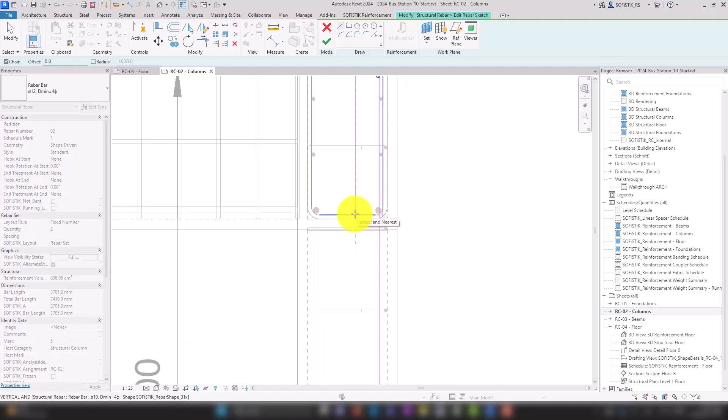The usual Revit functions are available for sketching. We intersect these two segments and we are actually already done. Of course, an experienced designer would have already used cranked rebars right from the beginning and avoided this work step. But there are often unforeseen changes.

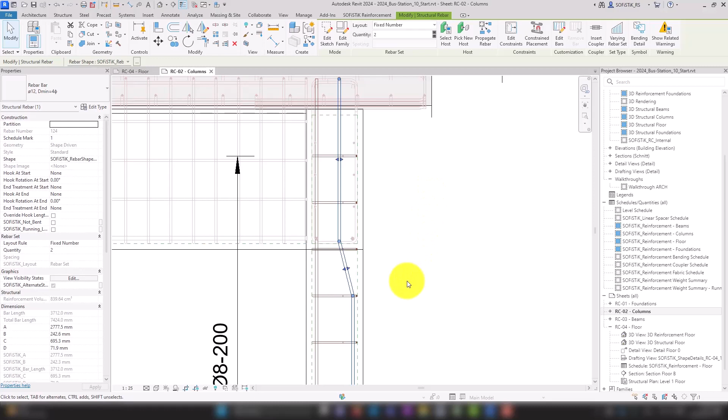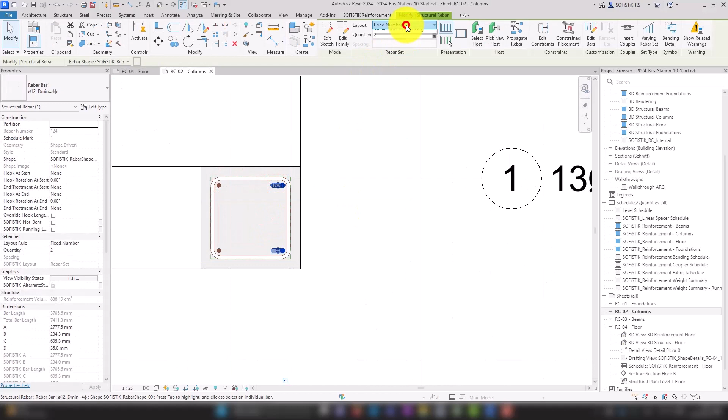We can set the desired offset here using the segment length parameter D. I will choose 35 millimeters. And let's switch to the top view to rotate our bars towards the center of the column. To do this, we change the layout rule to single and rotate the rebar around this point by 45 degrees.

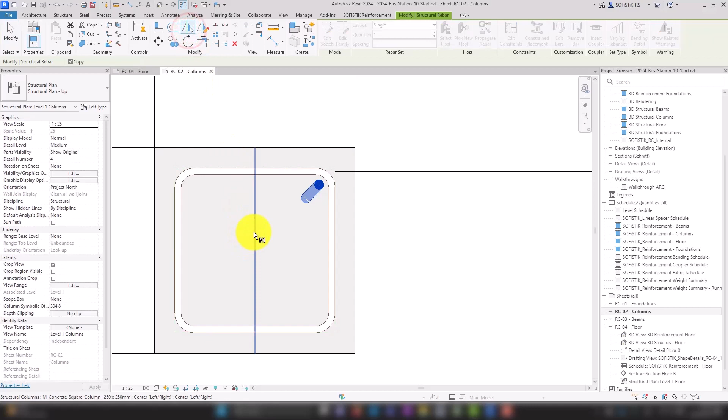We can delete the rebar set here on the left side, and I will mirror our existing rebars here horizontally and the first one, and I will mirror both together vertically.

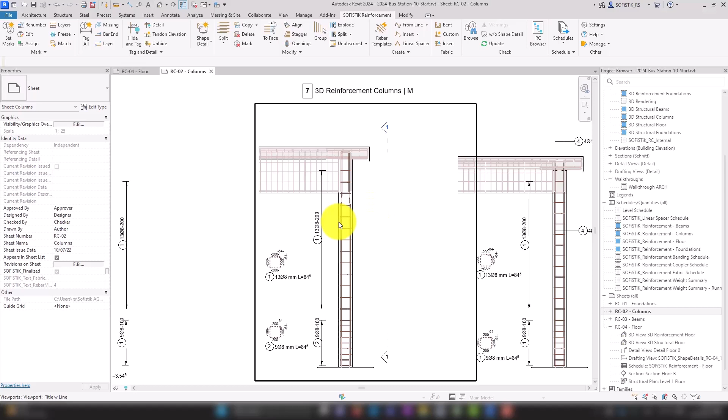Although the rebar shape updates automatically, if a rebar set is deleted or, as it happened, the bending shape is changed, the shape detail is also deleted and needs to be created again. A good moment for the Without Shape Detail tool, which hides all the rebar sets that already have a shape detail. Now we can comfortably add the two missing shape details. I would like to remind you once again to use the Shift key for orthogonal placement.

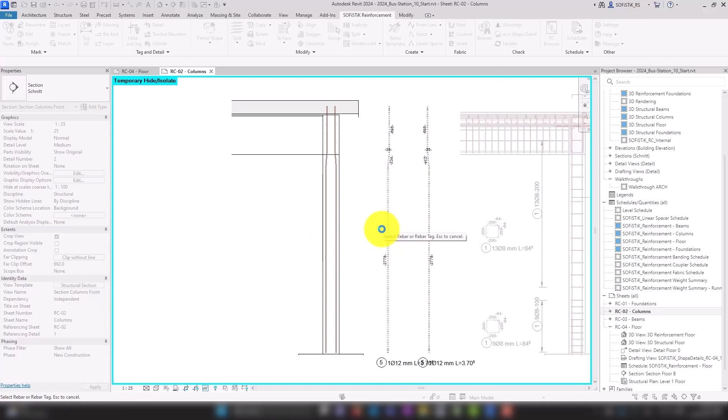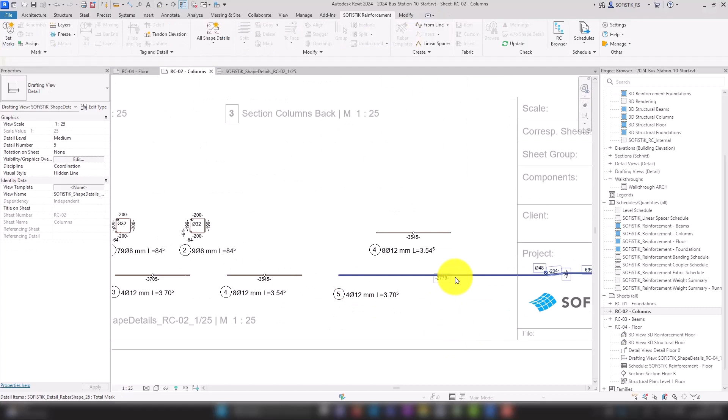Let's also update all of our shape details in the view. To do that, we click on All Shape Details. Now we either adjust our shapes here as desired, or we can also delete this drafting view in the project browser and let the program regenerate the entire arrangement. So let's delete it here. So depending on how much you have already adjusted, one or the other way may be the better one.

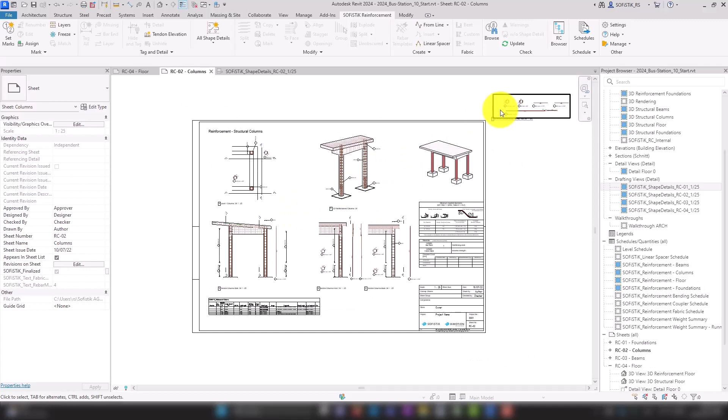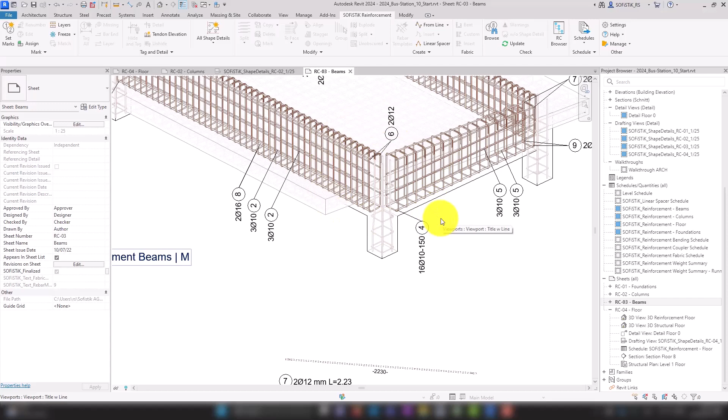Let's move on to the connection bars in the corner joints and switch to the beam sheet RC03. We have already learned all the input methods required for this joint. I will not explain in detail every click anymore, but we will go through the rough steps together once again.

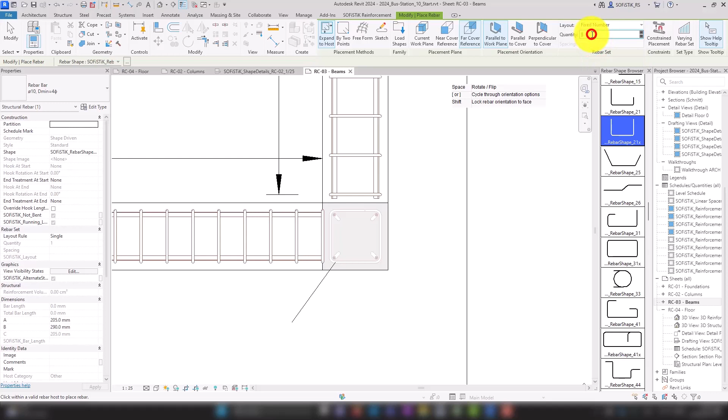We start with the horizontally crossing stirrups between our beams. I choose the beam reinforcement and the bending shape 21x, the far cover reference, layout rule fixed number with 4 bars. Now we rotate the stirrup and place it with a click. The stirrup is still too long and too wide, so we adjust the parameters A to 600 millimeters and B to 180 millimeters.

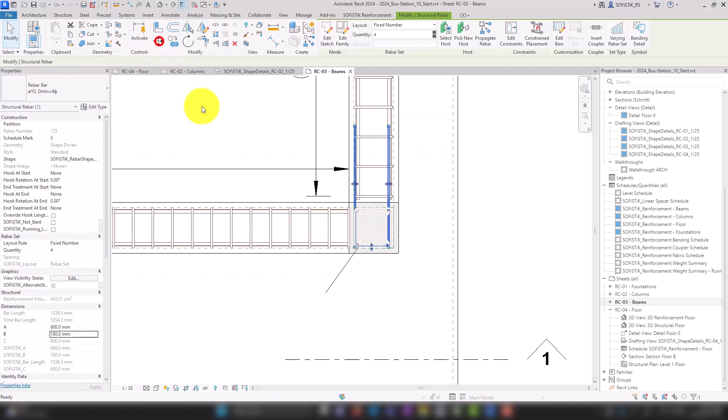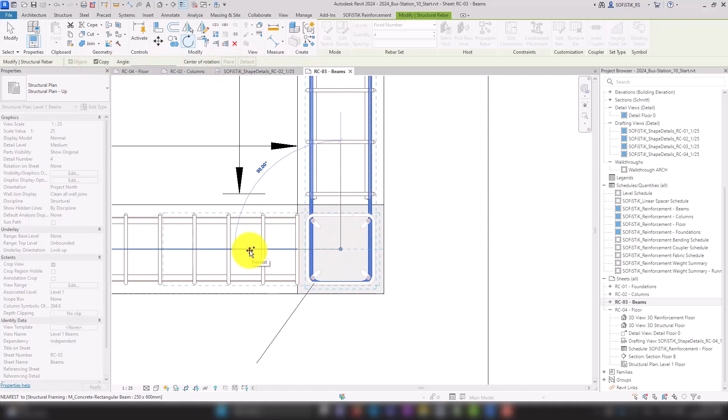And now we move our stirrup 1 centimeter to the right. For the second direction, in the other beam, we rotate the rebar set. Activate as a copy around the center of the column by 90 degrees. The next step here in the side view would be to align our stirrups vertically, either by using the shape handles or the rebar constraints.

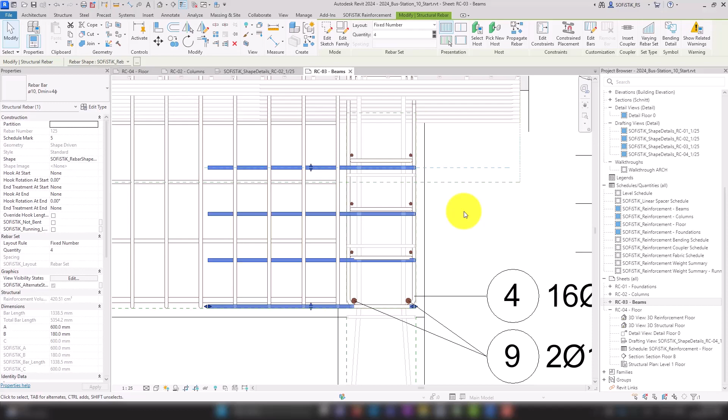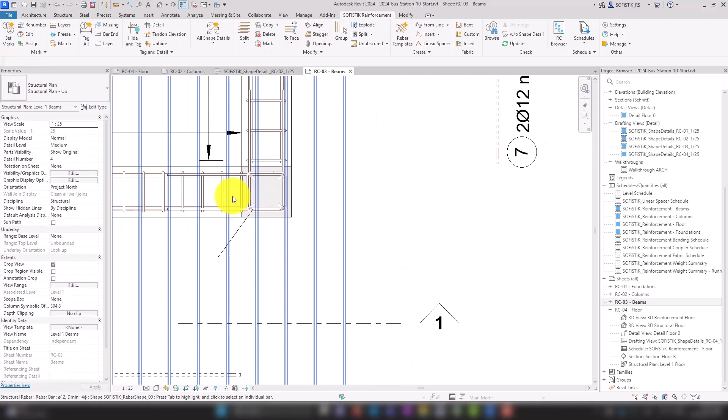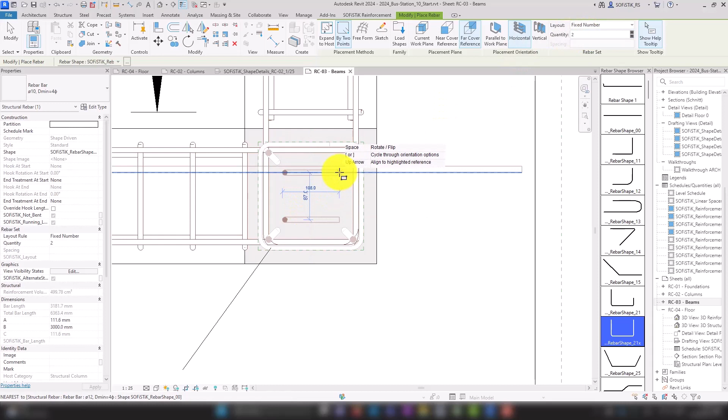Please create one stirrup at the top of the slab of the ceiling. We also need two vertical stirrups in the corners, as well as two connecting bars at our columns. We can create them here in the top view, for example, using the placement method with 2 points and a quantity of 2, and place them. And we can also rotate them as often as needed by clicking the spacebar.

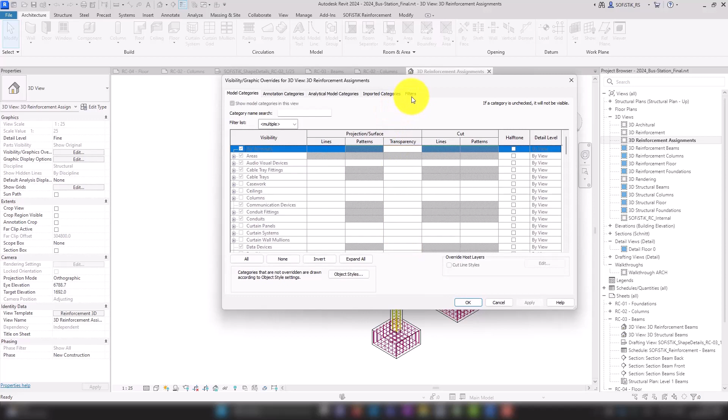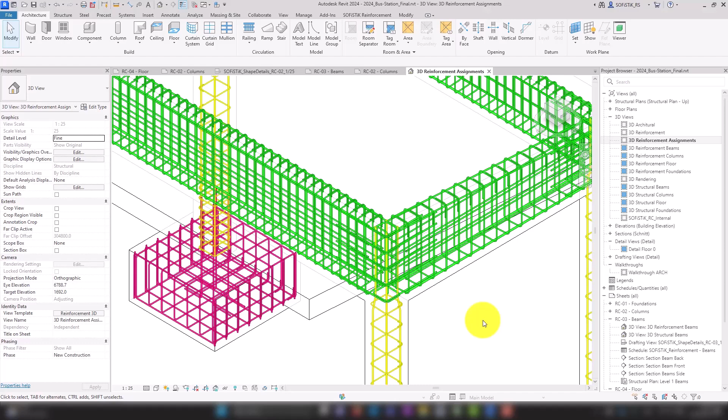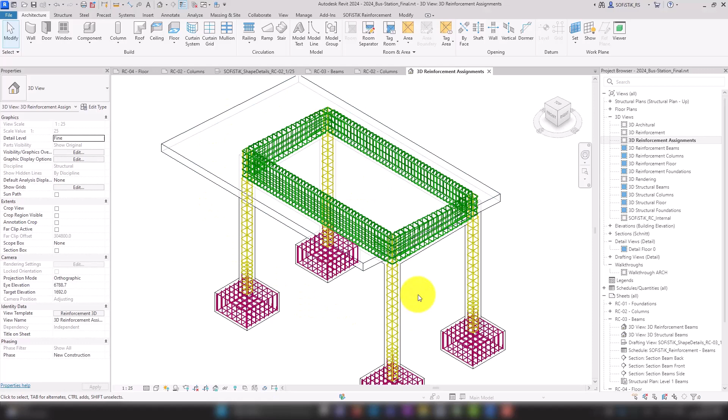I will briefly hide the slab reinforcement using our filter. And now we see our rebars again. The sloped one in the side beam, the two vertical ones, and so on. Please remember to copy or mirror the rebars to the corners to get the correct number of bars. Also, pay attention to the correct sheet assignment, which we can easily check using these color filters. A look at the detailed sheet here in the final project will surely help you with your exercises.

With that, we have reached the end of this introductory series, and keep in mind that we have only covered the basic functionalities of SOFiSTiK Reinforcement. For further topics, you can find corresponding feature and workflow videos.